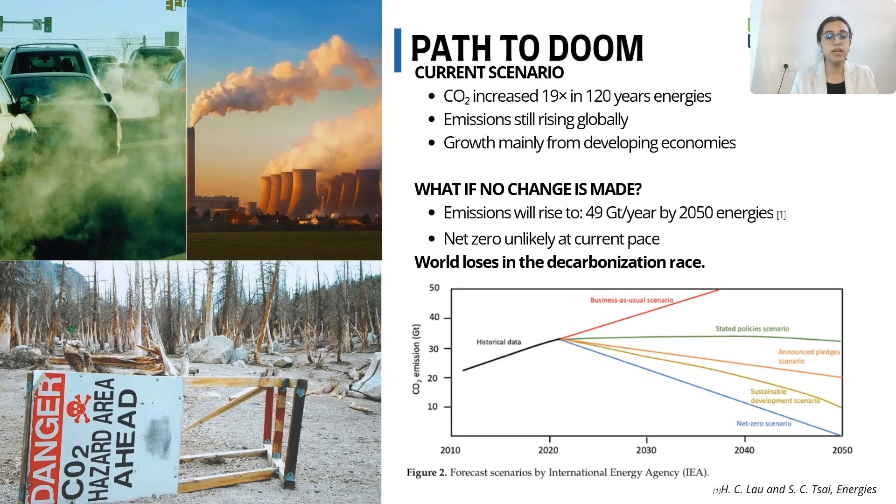The impact is not linear, it accelerates. Emitting just 4,000 tons of CO2 statistically results in one human death. And these deaths are not just due to heat, they come from collapsing systems: food, water, health. Climate change doesn't act alone, it breaks everything. This is no longer an environmental problem, it is a human survival problem.

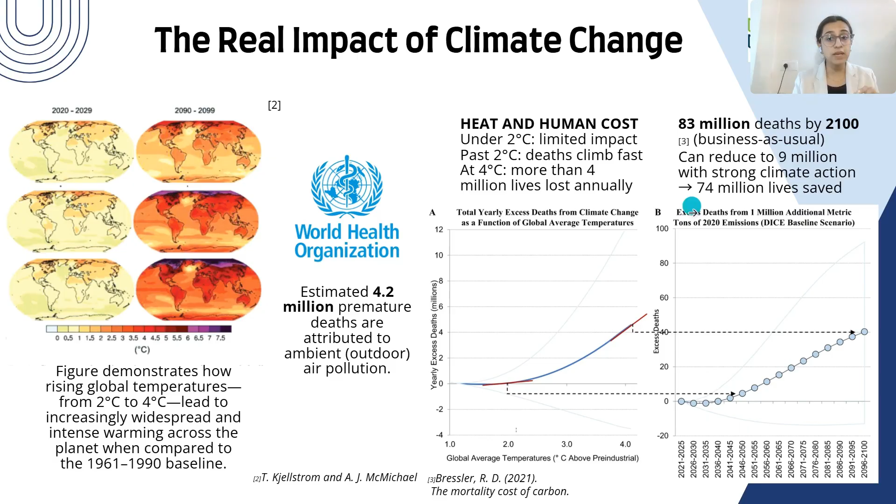And yet, the future is not inevitable, because the same carbon that is causing this crisis can also be captured directly from air. This is where DAC comes in, or direct air capture. DAC allows us to remove CO2 already present in the atmosphere, not just prevent emissions, but reverse them. Unlike traditional methods, it works independent of emission sources, making it a universal solution.

And this is exactly what we aim to do with a modular carbon capture cube. The system is designed to work at a ground level: scalable, deployable, and accessible. Because solving climate change is not just about reducing emissions, it is about removing what's already there. So, this is why we are here, racking our brains from across the seas to come up with a solution for the persistent problem of carbon capture.

Okay, so now that we've talked about the current emission situation as well as the need for direct air capture, let's quickly talk about the market analysis. I don't lie when I say this: carbon credits represent one of the fastest growing global markets today.

The market has already crossed around $800 billion and is projected to exceed $6 trillion in the upcoming decade. This rapid growth is being driven by global climate targets, increasing carbon regulations, and corporate commitments towards net zero emissions. What this tells us is very simple: that carbon removal is not just an environmental need but a massive economic opportunity.

Firstly, we'll talk more about the demand drivers. The demand for carbon credits is being driven by three key factors.

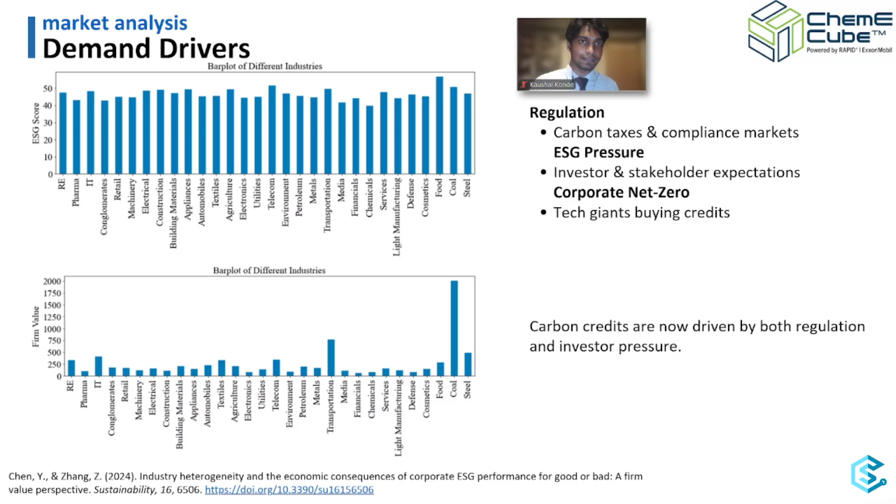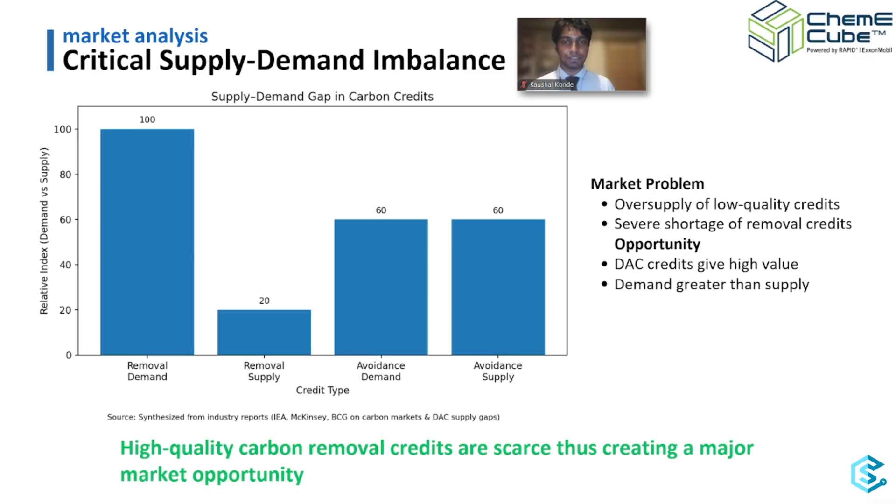However, there is a critical imbalance in the market. While low quality avoidance credits are widely available, high quality carbon removal credits are extremely limited. Technologies like direct air capture produce durable and verifiable removal, but current supply is far below demand. This creates a significant gap and a strong opportunity for scalable carbon removal technologies.

Building on the supply gap we just discussed, our solution not only captures CO2 but also creates direct economic value. At the top we show the primary value stream: carbon credits. CO2 is captured, measured, verified, and converted into high value removal credits, which can then be sold to corporations with net zero mandates.

Due to the high integrity of direct air capture based removals, these credits command premium pricing in the market. Beyond credits, our system also enables participation in a broader carbon economy. Captured CO2 can be further utilized to produce fuels, chemicals, or advanced materials, unlocking additional revenue streams.

This dual value approach allows us to transform CO2 from a liability into a scalable economic asset, while targeting high emission industries and corporations actively seeking verifiable carbon removal.

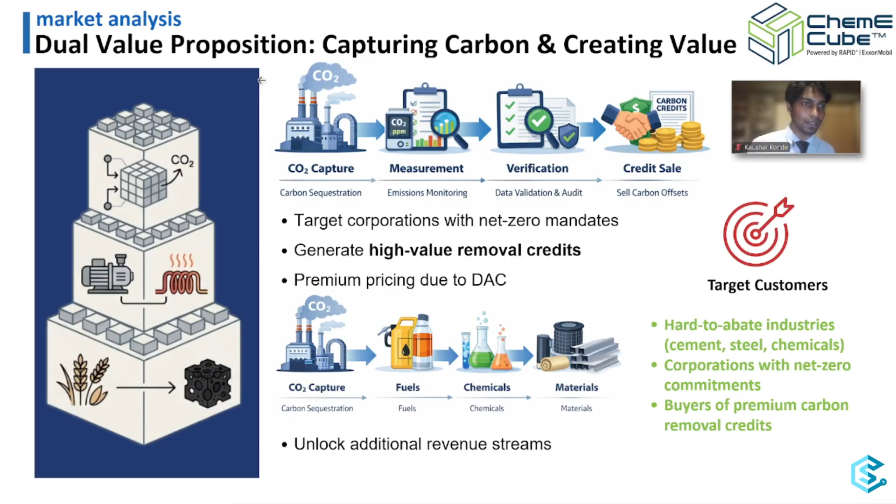Now we'll talk a bit more on the Indian scenario, because we strongly believe India has very high value for renewables. So we'll quickly go through the Indian scenario at hand.

Our team is tackling the ultimate frontier for climate tech: direct air capture. In the Indian context, direct air capture is no longer a future technology, it is a strategic necessity. The Union Budget 2026-27 has unlocked 20,000 crore rupees for carbon capture, utilization, and storage.

Our DAC approach specifically targets the indigenization of sorbents. By utilizing rice husk biochar, an abundant Indian agricultural byproduct, we reduce capex by up to 40%, through the VGF framework, making direct air capture commercially viable for the domestic market.

The economic engine of our project is the Indian carbon market, set to be fully operational by October 2026. Unlike traditional point source capture, direct air capture credits are high value removal credits, and in global markets these command a premium.

By generating carbon credit certificates through atmospheric removal, we provide a high ROI pathway for hard to abate sectors like aviation or shipping that cannot easily capture at the source. With market estimates between 600 to 900 rupees per ton, we aim to provide a high ROI pathway, creating a policy driven growth market for our technology.

Hello again. I'll quickly discuss our mechanism and the sorbent that we've proposed. But before going forward, we'd like to highlight that our team strongly believes the sorbent and technologies we put forth should always focus on being carbon negative along with being efficient.

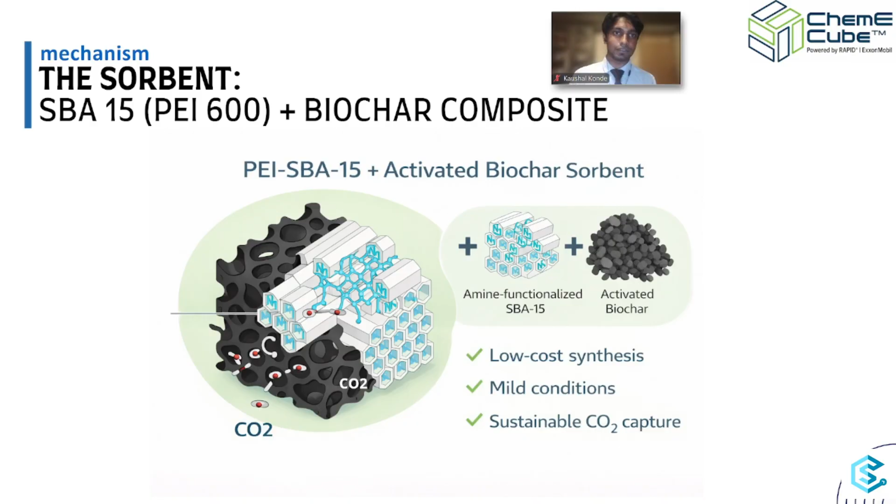So here's the sorbent we've proposed. It consists of a solid supported amine adsorption mechanism using a hierarchical composite sorbent, made of SBA15 mesoporous silica functionalized by PEI, supported on activated rice husk biochar. This creates a hierarchical structure where each component plays a specific role in enhancing CO2 capture.

The biochar acts as a macroporous skeleton, providing low resistance pathways for bulk gas transport. Kinetics are key in direct air capture since atmospheric concentrations are as low as 420 ppm, so providing low resistance pathways to the active sorbent that performs chemisorption is essential. These large pores allow atmospheric air to rapidly diffuse into the particle.

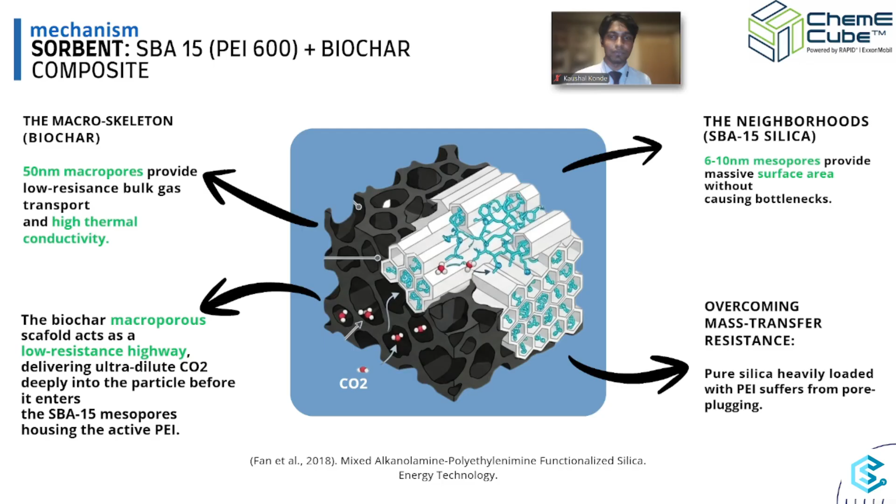Within this structure, SBA15 provides ordered mesopores which offer high surface area and serve as active sites for PEI loading.

This hierarchical design that we have proposed overcomes mass transfer limitations. Unlike pure silica systems where pore blocking can occur, the biochar scaffold enables efficient delivery of CO2 deep into the sorbent, improving overall utilization of active sites.

At the molecular level, CO2 reacts with the amine group in PEI to form a reversible carbamate species. This chemisorption mechanism allows selective and efficient CO2 capture even at very low atmospheric conditions.

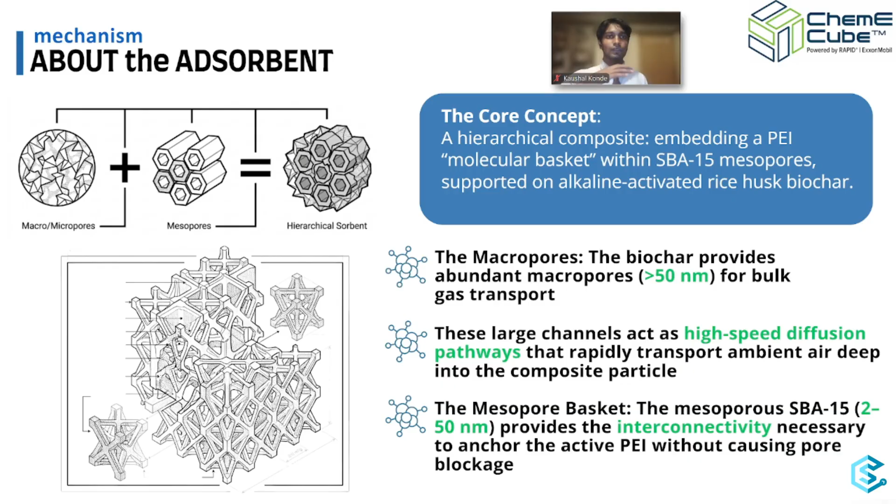The core concept is a hierarchical composite where we have SBA15, which is mesoporous and loaded with PEI, our molecular basket, and all of this is nicely resting on alkaline activated rice husk biochar.

Let's go further and discuss our proposed sorbent production mechanism. We follow a very standard procedure for PEI loading onto our mesoporous silica, SBA15, and this is the overall process flow for the sorbent production mechanism.

I would like to highlight that we have added an optional heat treatment to increase structural stability for our composite, and the mixing of biochar will be done through either ball milling or just physical mixing.

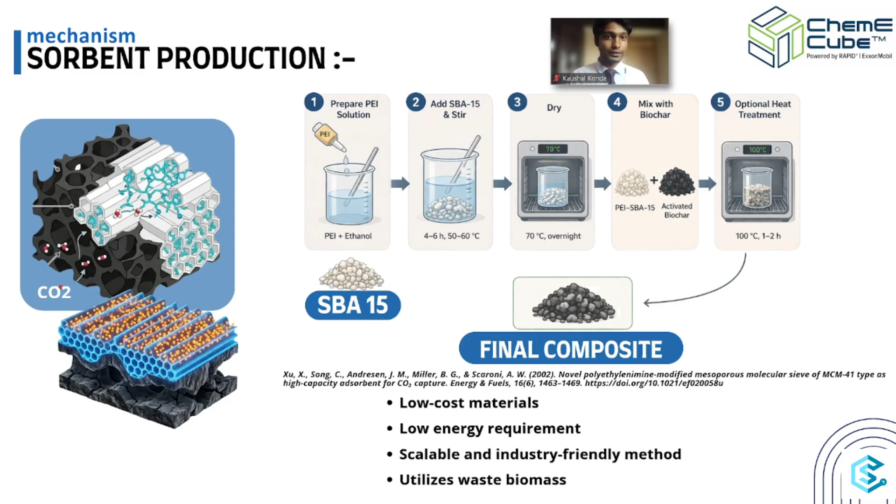This sorbent production method is very low in terms of energy requirement. It is very scalable and industry relevant, and also it utilizes waste biomass, which in turn adds to our carbon negativity.

The question at hand is, why did we use solid supported amines over liquid systems? Solid supported amines were selected over liquid systems due to their significantly lower regeneration temperature, operating at 60 to 80°C compared to nearly 900°C for hydroxide based systems.

This 60 to 80°C band is based on a regeneration method of temperature vacuum swing. This makes them far more energy efficient and practical for our setup.

Among mesoporous supports, SBA15 offers the best balance of cost and performance, providing high surface area and ordered porosity at a lower cost compared to alternatives such as KIT6 and KCC1.

Let's talk about the selection criteria for selecting our amines for our system. We went ahead and selected branched polyethylenimine due to its superior thermal stability and resistance to volatilization.

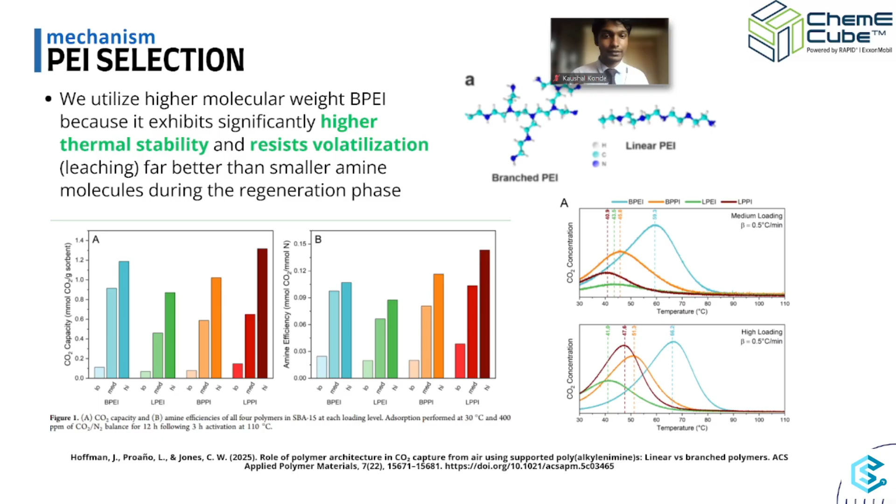Compared to smaller amines, branched polyethylenimine shows significantly lower leaching during regeneration, which improves sorbent longevity and safety. This makes it highly suitable for cyclic direct air operation.

As shown here, branched polyethylenimine maintains high adsorption efficiency at medium loading while exhibiting minimal degradation over multiple cycles. This balance between performance and stability is critical for ensuring consistent operation in repeated adsorption and desorption cycles.

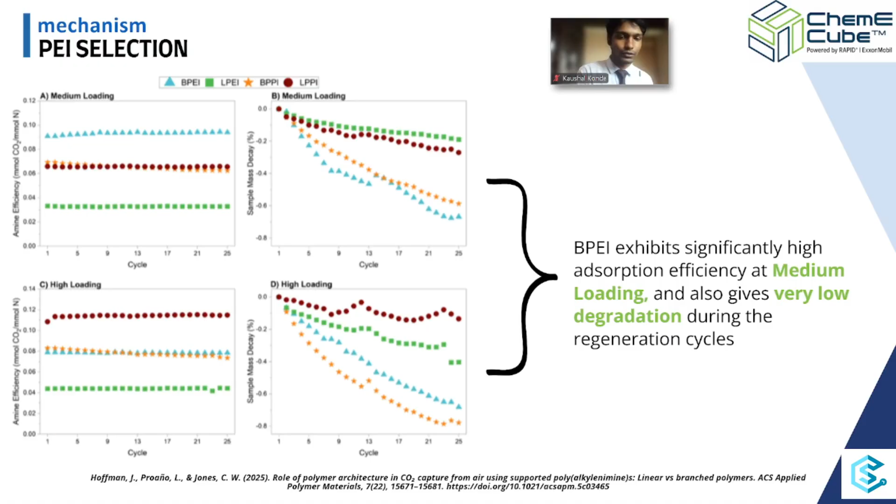We further selected PEI 600 due to its high nitrogen content, which enhances CO2 adsorption capacity. This allows for more active amine sites per unit mass, resulting in higher capture efficiency under DAC conditions.

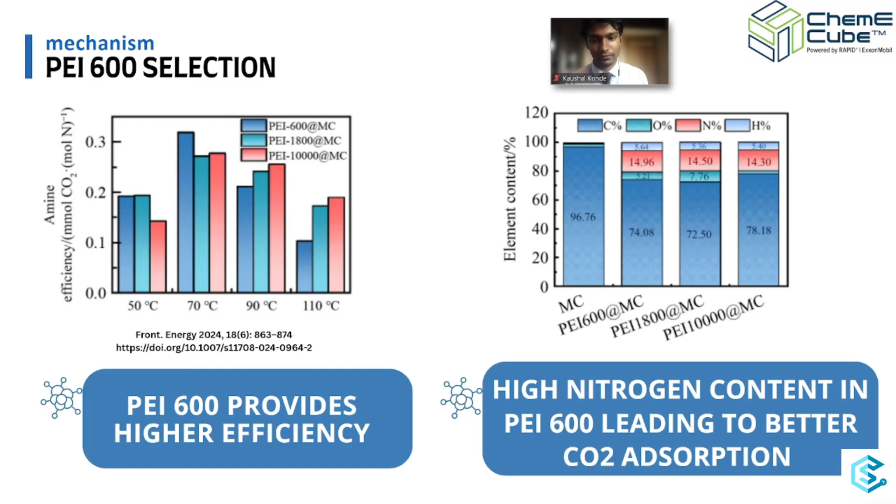We compared PEI with other amines as well, such as TEPA and TEA. While TEPA suffers from volatility and leaching, and TEA presents toxicity and nitrosamine risks, PEI offers low volatility, high stability, and safer operations due to its polymeric nature. This makes it a more suitable choice for a solid phase DAC system.

Now let's go ahead and discuss the selection criteria for our support, which is SBA15. As discussed earlier, our team strongly believes that higher kinetics are a must for direct air capture operations. So we went ahead and started looking at kinetic models for various mesoporous materials.

The above shown kinetic model shows that PEI supported on SBA15 achieves higher adsorption capacity compared to other supports. This indicates faster reaction rate and better utilization of active site, which is essential for shorter duration DAC operation.

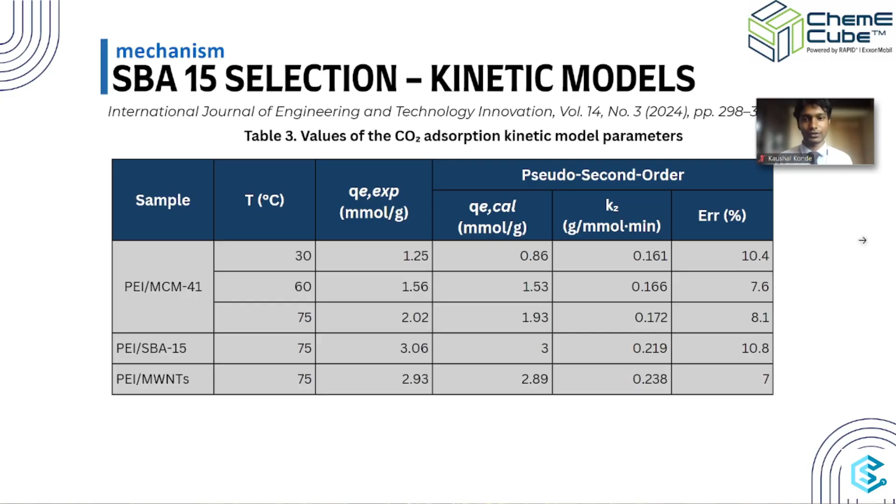As seen in the data, SBA15 maintains strong adsorption performance even after PEI loading. Its mesoporous structure preserves accessibility while providing high surface area, enabling efficient CO2 capture without severe pore blockage.

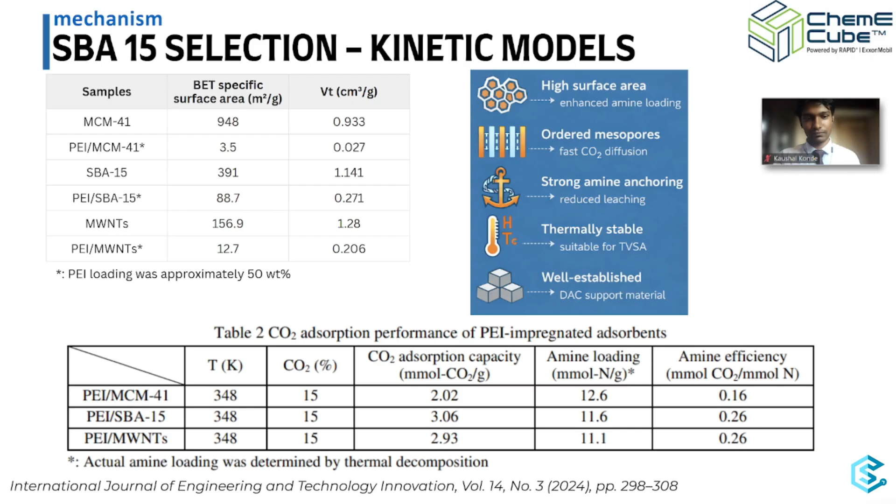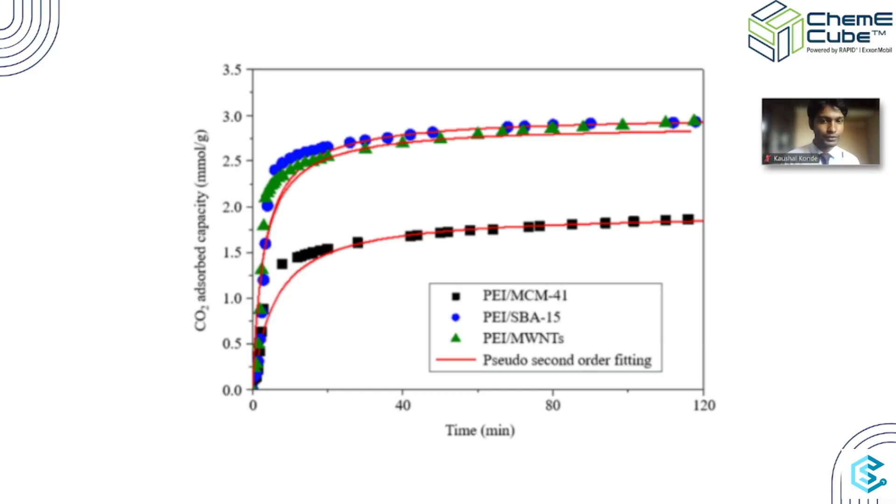This is the model fitting curve that we found, and we can see that SBA15 provides the best CO2 adsorption capacity, demonstrating the adsorption behavior over time, showing rapid initial intake followed by gradual saturation. This highlights that our system is primarily mass driven, which aligns with our design focus on faster kinetics.

Now I'll be talking about why we chose to involve biochar as a critical part of our system. This is because biochar provides inherent macropores which act as low resistance diffusion pathways, allowing ambient air to penetrate deep into the sorbent structure. Additionally, biochar acts as a rigid scaffold, preventing pressure drop issues that are common with fine silica powders.

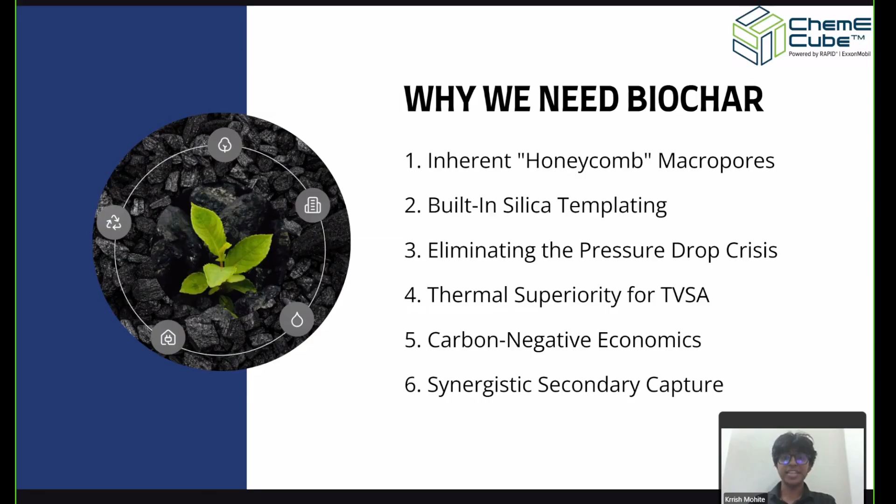And finally, since it is derived from agricultural waste, it is significantly used to reduce the cost while still maintaining the performance.

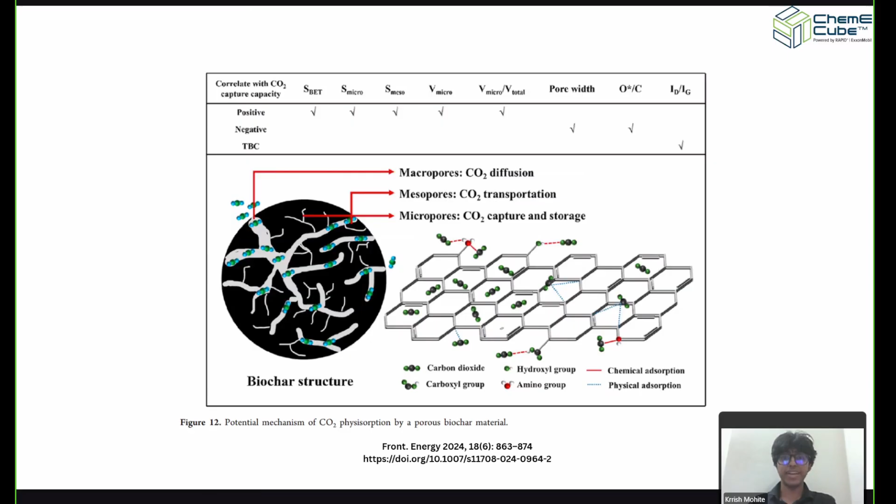This slide shows the general role of different pore sizes in adsorption systems. Firstly, we have micropores, which are typically associated with physisorption due to their high surface area. Secondly, we have mesopores, which allow loading of active materials like PEI within silica, while still maintaining accessibility for CO2. And lastly, we have macropores, which enable bulk diffusion, allowing air to flow easily through the structure.

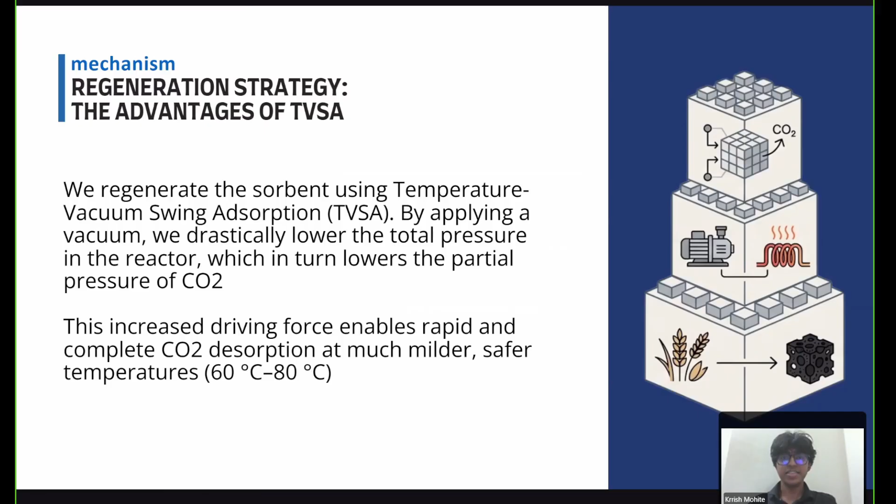For our method of regeneration, we opted for temperature vacuum swing adsorption because the application of vacuum along with mild heating reduces not only total pressure but also the partial pressure of CO2. This creates a stronger driving force for desorption. Because of this, we can regenerate the sorbent at a much lower temperature of around 60 to 80 degrees Celsius, which is significantly safer and consumes much less energy compared to other conventional methods.

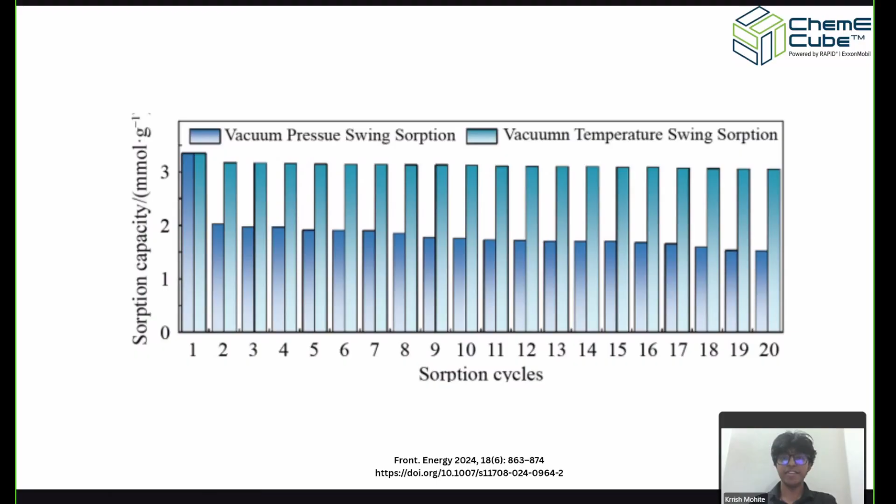The following graph compares vacuum pressure swing adsorption with temperature vacuum swing adsorption. We can see that across multiple cycles, the adsorption capacity remains stable for TVSA, which means that the sorbent in TVSA does not degrade as quickly as compared to that of vacuum pressure swing adsorption, therefore making TVSA a far superior choice over VPSA.

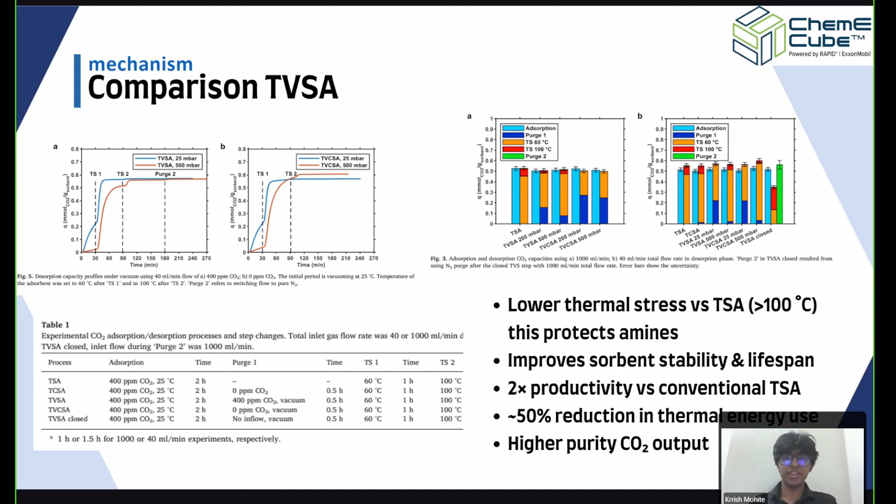This slide also shows the performance of TVSA over multiple cycles. From the adsorption curves on the right side of the slide, we can see that the adsorption capacity remains stable in the case of TVSA, indicating low degradation of the sorbent. From the desorption profiles on the left side, we can observe that applying vacuum increases the regeneration kinetics. So it can be stated that TVSA improves both regeneration kinetics and long-term stability.

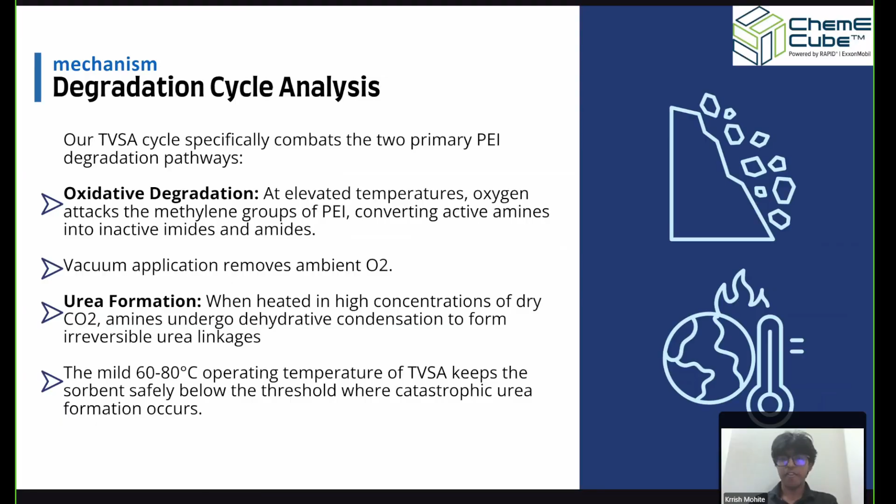Now I'll be talking a bit about degradation in amine systems. There are two main pathways: one is oxidative degradation and the other is urea formation. Our proposed TVSA system helps mitigate both of these problems. The vacuum reduces the presence of oxygen, limiting oxidative degradation, whereas the lower operating temperatures, around 60 to 80 degrees Celsius, suppress the formation of urea.

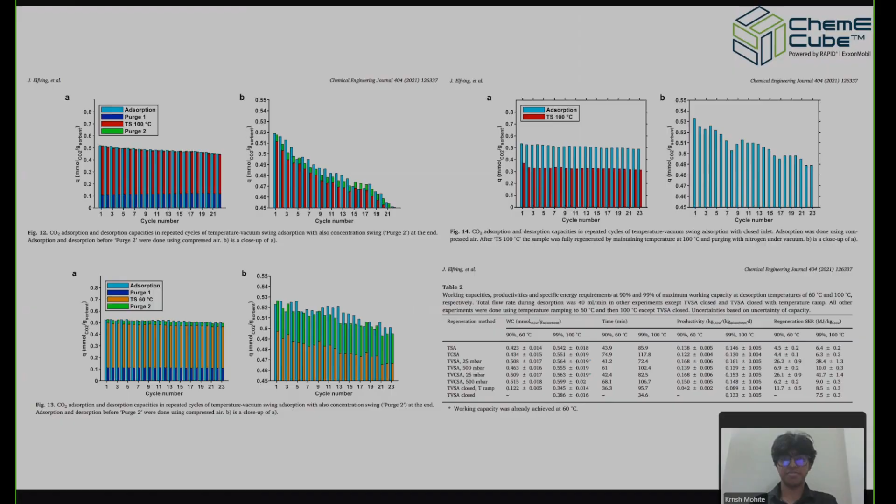Now there is some more data on how TVSA works. The three given graphs show the performance of TVSA under varying parameters. Across the cycles, the adsorption capacity remains fairly stable, while the desorption profiles show consistent regeneration behavior. From the table at the bottom right, we can see how operating conditions like pressure and temperature affect working capacity, productivity, and energy requirement. So to sum up, TVSA can be optimized to achieve a strong balance between performance and energy efficiency.

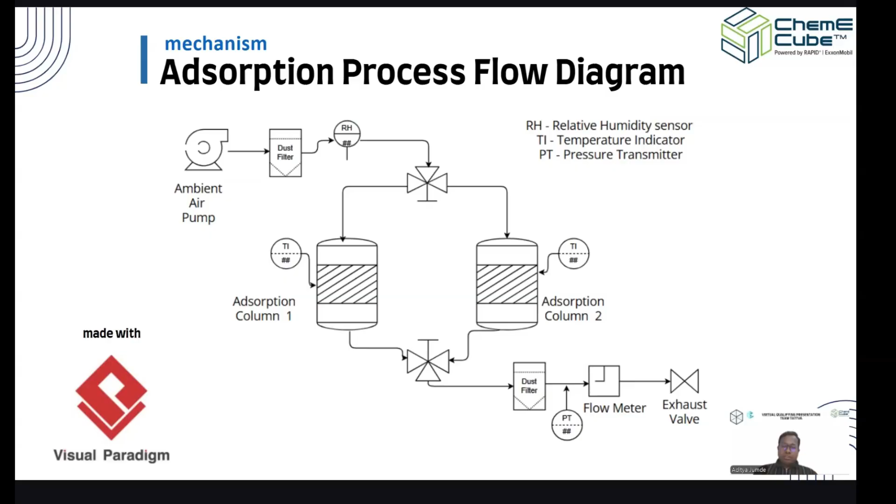In a DAC system, sensors are our primary safety barriers. Pressure transmitters are vital for detecting bed plugging. Any sudden increase in pressure drop alerts us to filter blockages or sorbent settling, allowing for an immediate safety shutdown to protect the flow.

Relative humidity sensors help us with high humidity, which can cause PEI leaching or silica pore filling. We monitor this moisture to ensure the sorbent remains in a safe operational window. Temperature indicators detect any hotspots from the exothermic heat of adsorption. Monitoring the change in temperature ensures the system stays within thermal limits. This sensor-driven safety protocol ensures our system is as reliable as it is efficient.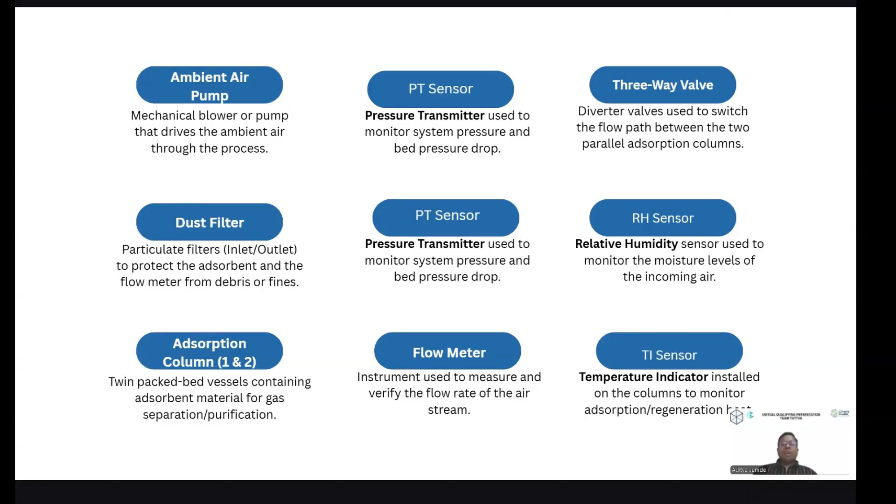So I will be explaining the electronic schematic of our project. We have added electronics for the autonomous operation of our cube. We have opted for an STM32F4 series microcontroller due to its versatility and powerful performance.

We have also opted for an SD card module for data logging. We have added an ENS210 sensor for measuring relative humidity, three DS18B20 sensors for measuring temperature, two BME280 sensors for measuring pressure, and an STCC4DR3 sensor for measuring carbon dioxide.

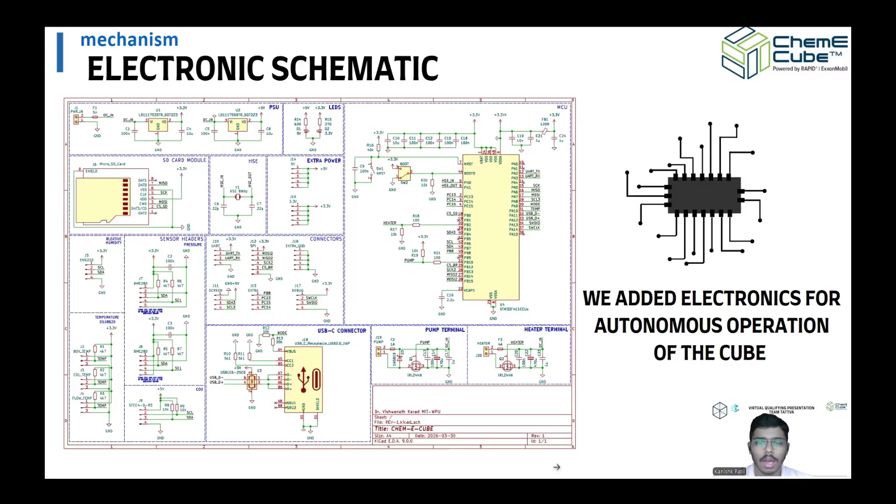We have also added a USB-C connector through which we can program the microcontroller. We have added two screw terminals for the pump and the heater control, and these will be controlled by an IRLZ44N MOSFET, a logic level MOSFET, which helps us switch the terminal output on and off depending on the feedback from the sensors.

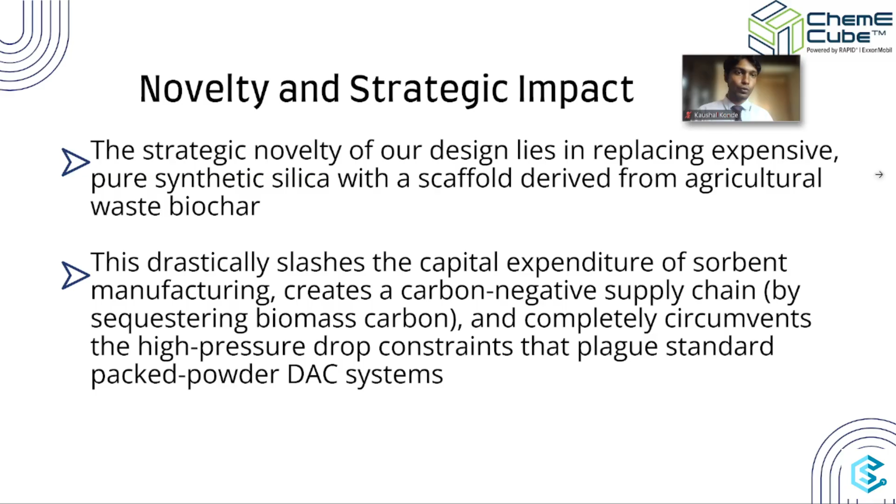Let's go ahead and discuss the novelty and strategic impact we wanted to showcase through our design. Our key novelty lies in replacing expensive synthetic silica with a biochar based scaffold derived from agricultural waste. This significantly reduces material costs while enabling a carbon negative supply chain. At the same time, the hierarchical structure overcomes pressure drop limitations, improving overall system efficiency compared to conventional DAC systems.

Now let's go ahead and talk about the safety considerations during the design phase of our cube. I speak for everyone when I say this system is super cool, but with any system that deals with chemicals and heat, we need to stay sharp. Our main concern is fine dust particles or vapors. For this, the system is sealed shut using filters and an enclosed system.

Pressure and temperature regulation is of equally great importance, as the PEI starts degrading above 80 degrees Celsius. We deal with this by incorporating sensors and insulation. We use a low temperature vacuum process to stop oxidation of the PEI.

In any system, mechanical stability is as important as chemical stability. The air might take a shortcut, causing the system to fail. Moreover, condensation might fill up the pores and clog the filters. These problems sound fatal, but the solution is equally neat and simple: uniform packing and continuous monitoring will not only solve these problems but also identify future problems at a very early stage.

We are dealing with chemicals like K2CO3 and PEI, and they are not to be messed with. A PPE kit is a perfect tool to work with these chemicals. Moreover, the biochar needs to be at a critical pH of 7, and the materials need to be dried completely to get the desired results.

Vacuums, transistors, and other electrical equipment are prone to stress, leaks, and shocks. Like every other electronic component, we use safe connections, insulation, and gentle handling. This will ensure a long life of the system and safe operation.

Our product is nearly perfect if it weren't for science, and by that I mean the degradation of components due to age. Someone did say that all good things must come to an end, and I would like to disagree with it. By periodic monitoring and replacement of chemicals, our system will work for an extended period of time, so you have time to do greater things for yourself and the planet.

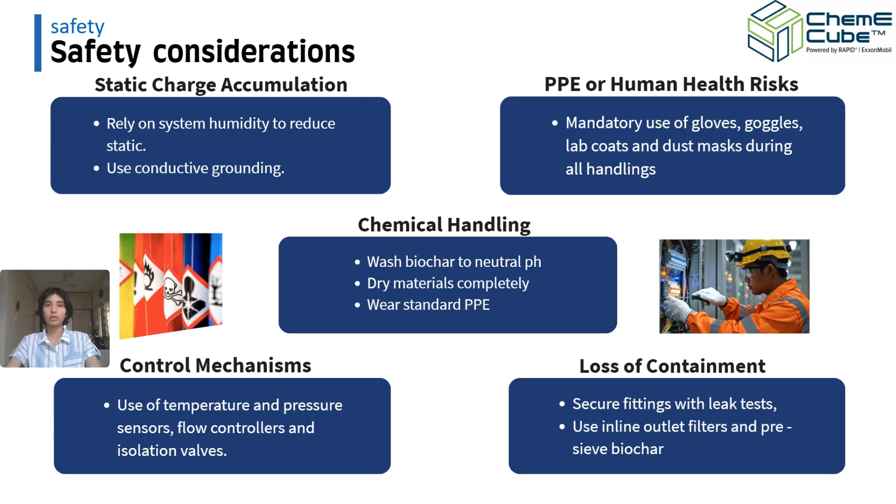In the end, safety boils down to insulation, monitoring, and proper disposal. Keep it sealed, keep it cool, stay safe.